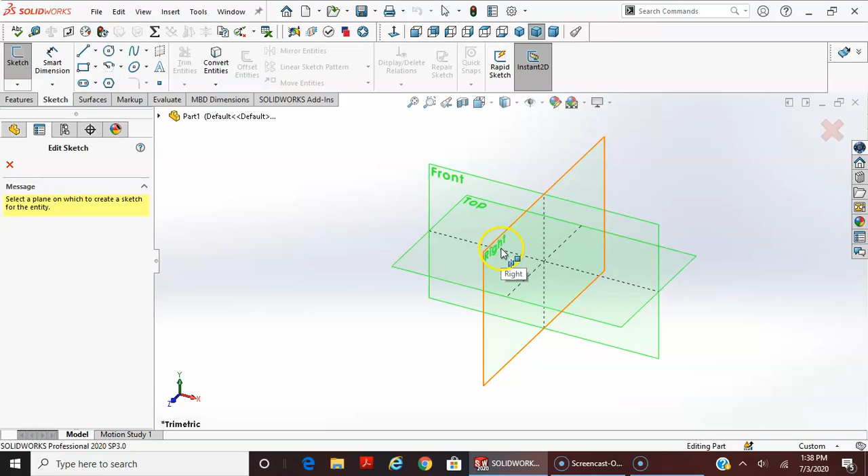So I have my part file open. I'm going to start with a sketch tab, sketch icon. The orientation again doesn't matter. I'll just for example use the right. And it's pretty easy for this.

I'm going to ask for 3 sketches and 3 features. So the first is going to be the base, and I'm going to start very simply like this.

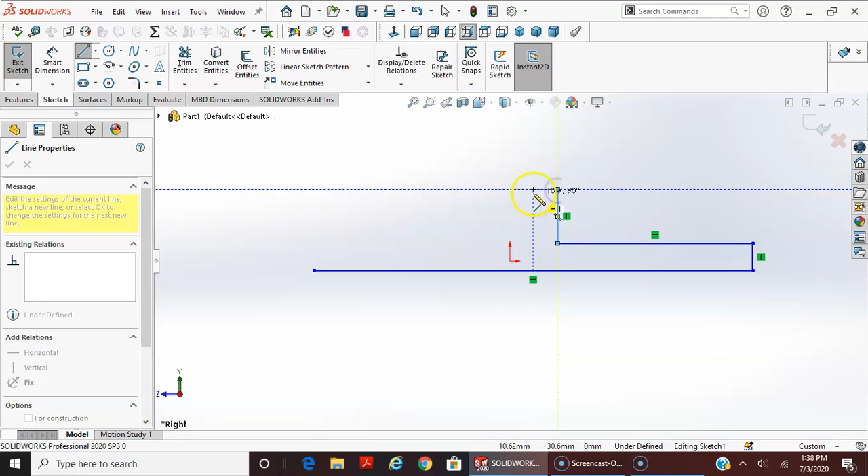I'm going to make the half profile of the screwdriver like this, maybe a little arc here, going up to a straight line from here, and then go back to an arc, and I'll actually make this a vertical line. So just based on this isn't going to have a tangent point, but I will add this and this with a tangent point.

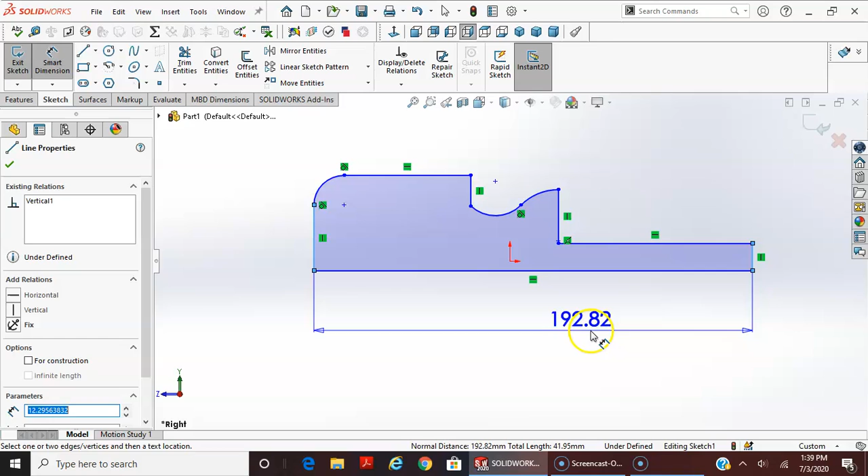Now it's really important on your assignment that you dimension all of this. I have this again in metric. I'll do here and here, and here and here like this. Make sure this is all dimensioned.

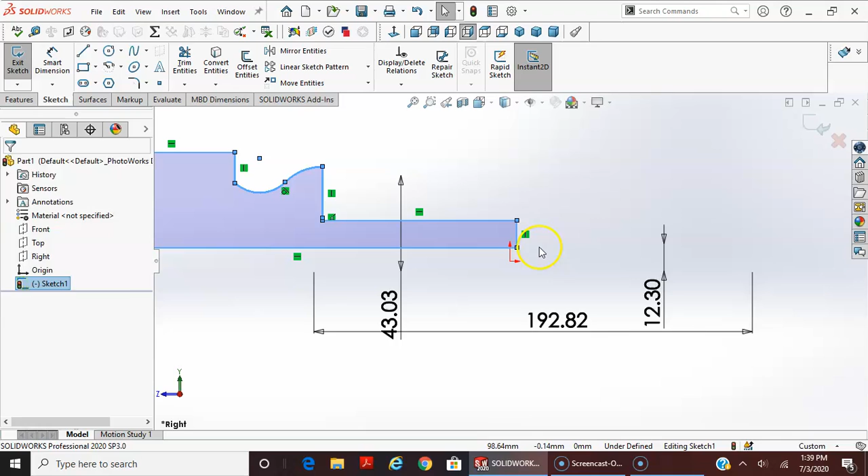Now, these entities are all blue, but if I were to take this, I'm going to drag this over a little bit, and I'm going to make this point, hold Control down, and make my part origin coincident. And you can see once I did that, some of these entities that are dimensioned are black. So these defined entities are black, the underdefined entities are blue.

When you do yours, I want this sketch completely defined, okay? The other sketches I actually kind of don't care about, but I want to make sure the base sketch is defined. And I think in the book, they leave the tip sketch underdefined, and I'll show you another way how I do that to keep it defined.

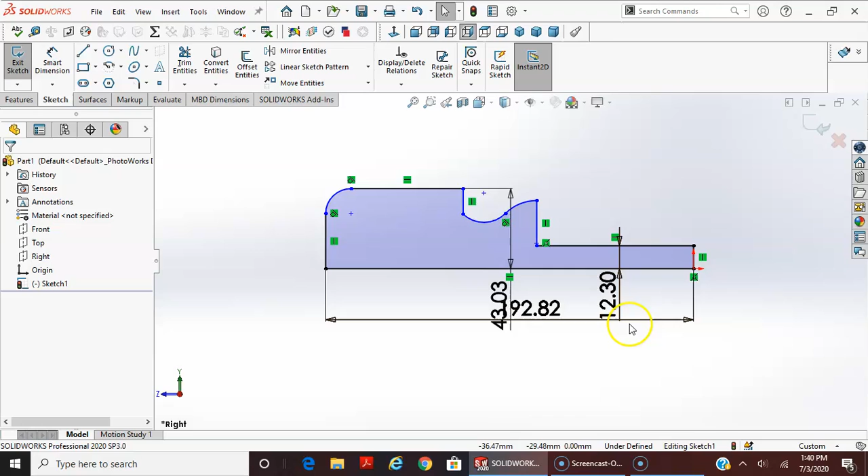So from here, it's pretty easy. Again, keep this defined. Before I go any further, I'm going to add my last name, first initial, and the title is Extra Credit Screwdriver.

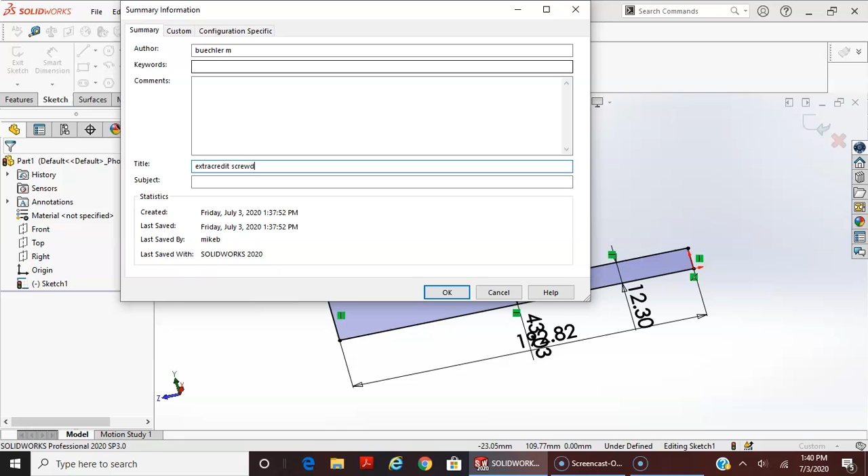And then I'm going to also do a file save as on my desktop, and it's going to be last name first, Buechler M, and I'll just type in screwdriver. So I now have a copy. This file is now saved on my desktop.

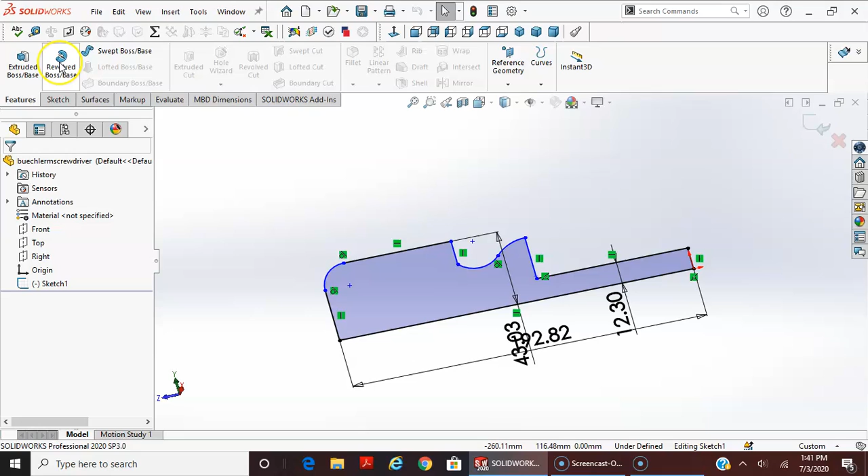So in what should be for you a fully defined sketch, mine's not defined, I'm going to select features, and instead of extrude boss base, I'm going to do the, look at the tooltips now. This is the updated version. They have the tooltips that have more directions and definitions when you keep your mouse over the icon.

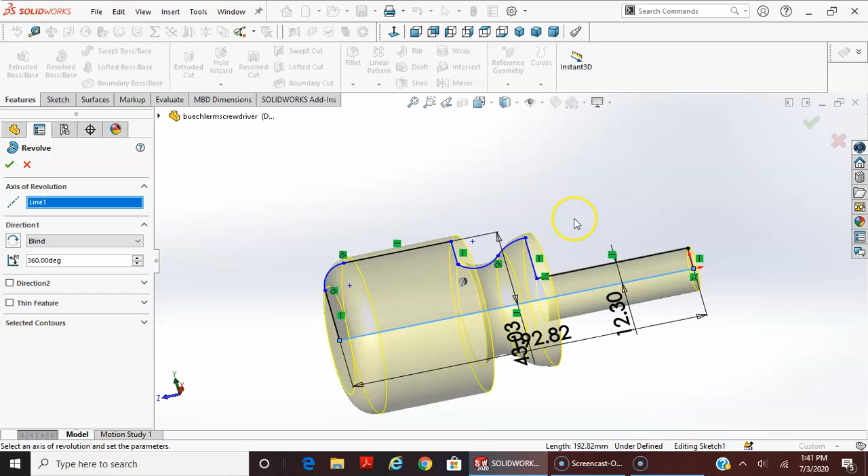I'm going to select the revolve boss base, a revolved one. The axis of revolution is going to be this line. This is the center of my part. The default is 360 degrees, so this all looks good. I'm going to say yes.

And this is the start. You can do it just like this, honestly. As far as your design, just make sure this sketch is fully defined. I can go back in and edit the sketch there. I'm going to do again, I might have messed up when I used the right.

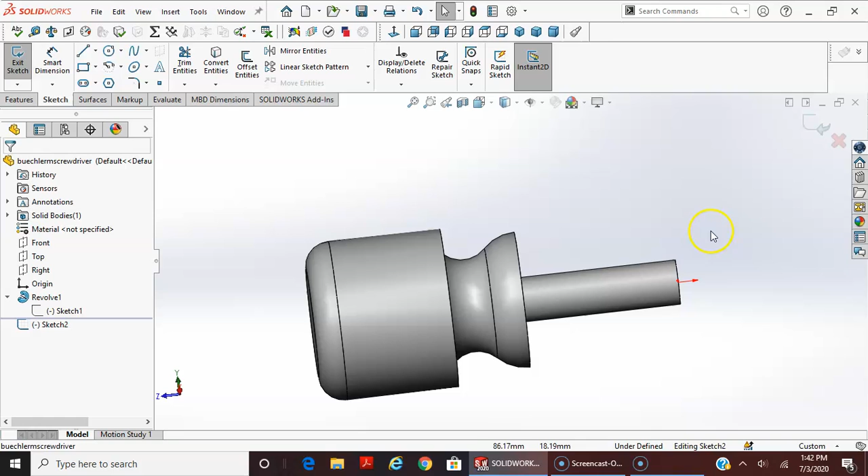So let's see, I'm going to sketch again. And on the flyout menu, let's go to, I can use the top. And for I'm going to go right click and go normal to.

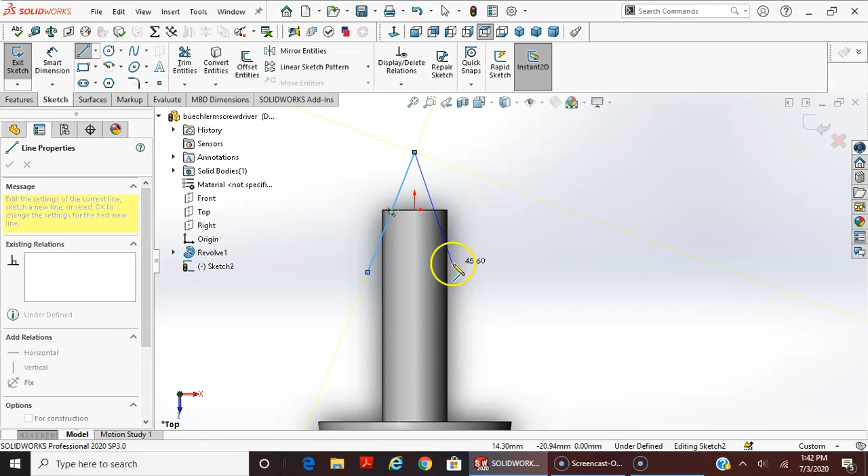For the tip, the book does it kind of confusing. I don't like how the book does it, so I'm just going to go like this. I'll draw a line, and then an arc like this. This part doesn't need to be defined, but you actually can define it.

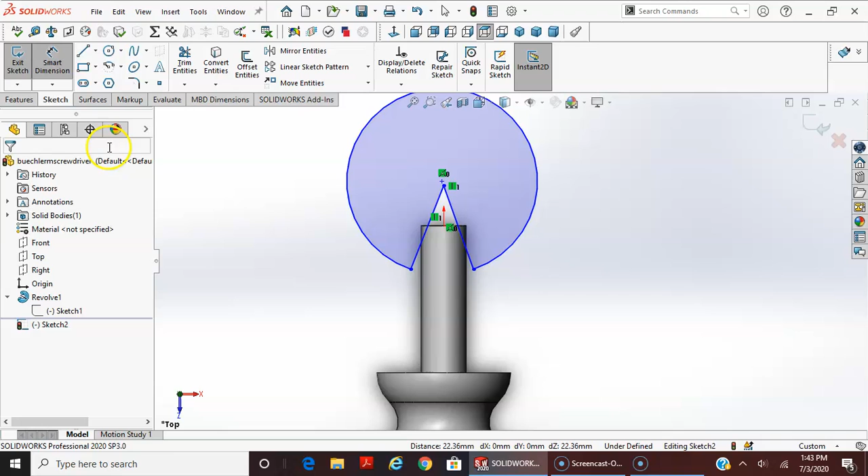A quick way is to select this point and this point, and make these vertical. Then I can dimension from here to here, using whatever number's there. I'll dimension this value the same way. Then I think the only thing left is to dimension from this point to this point.

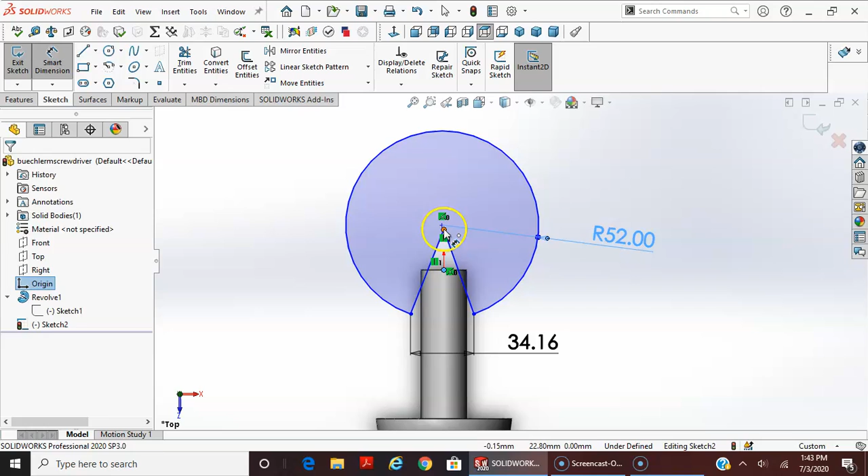Is that fully defined? No, there's something else wrong here. What else is wrong? How can I move this? Let me grab this and try to move it around.

Oh, that's how. So the way you do this is make a center line here, and I can select these three lines - one, two, three - and make them symmetrical. Done. But it's still not fully defined.

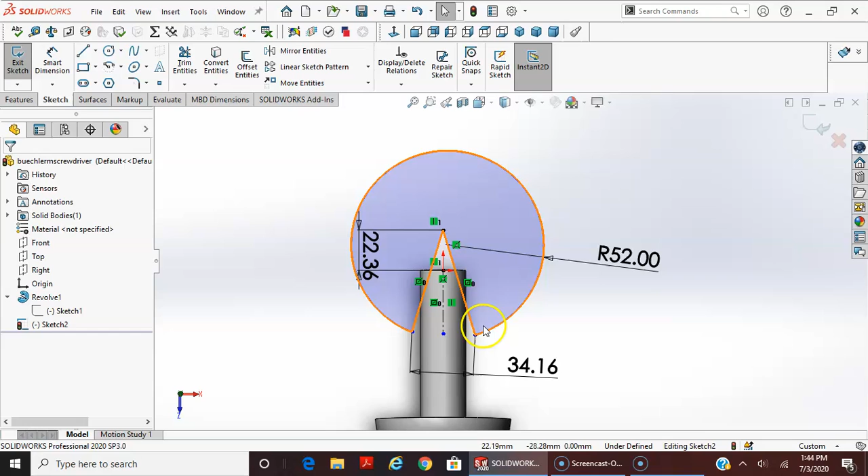Let's see what else is going on here. Maybe this line length - let's smart dimension this line length. Yeah, there we go. Boom, that's it.

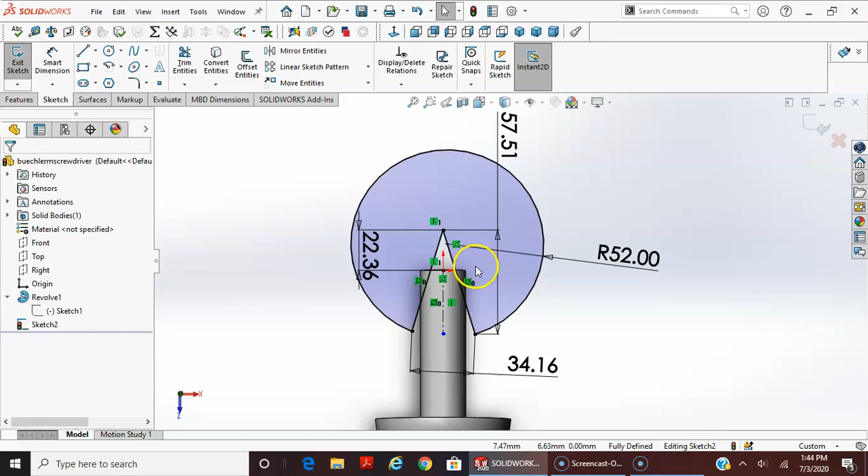So again, the book doesn't define this sketch - they do it kind of wonky, and that's fine. This sketch doesn't have to be defined, but I did define this one.

Now features - let's do a cut, and go through all, both sides. Done. So there's my tip. It's a very dull tip, but it's something.

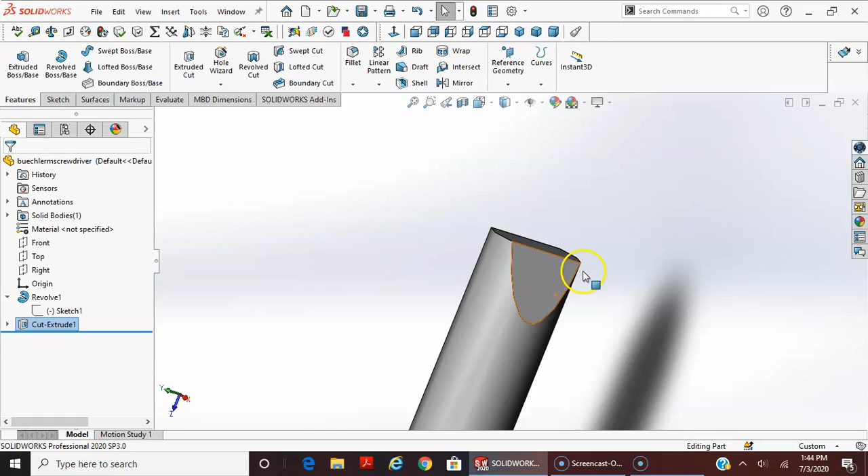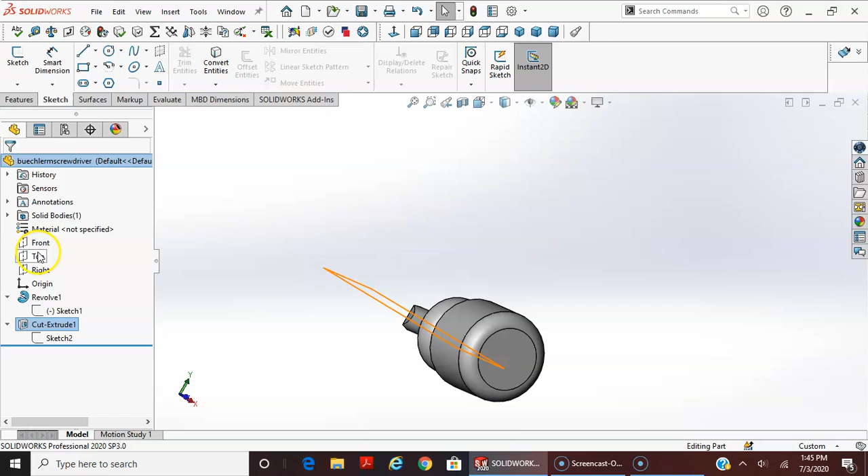On the third sketch - so I've got three sketches - this one needs to be defined, this one doesn't matter. Again, I'm going to select a sketch, and in this case you can probably use a default plane, which here I could have used the front plane.

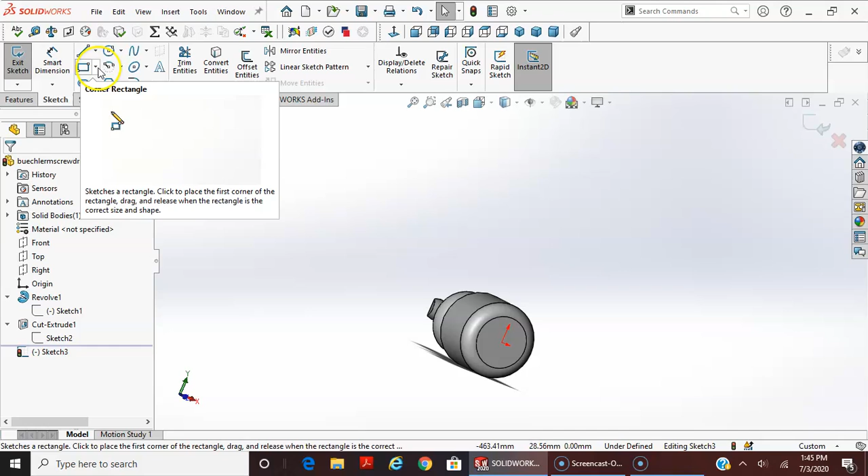But I'm going to select this face for the sketch. This is another example of how the book makes it really hard to do this, and I don't know why. I'm going to select the center rectangle.

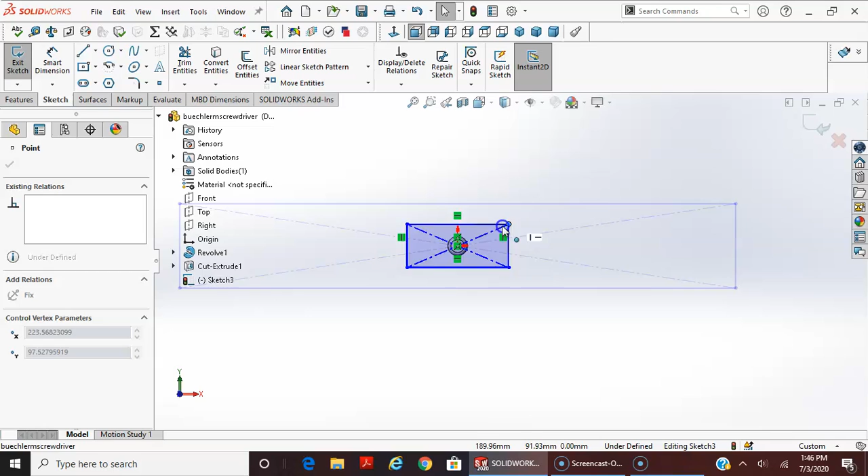I'm going to make this one kind of small, and this is an instance where we really want to see if I can get to normal-to with an active sketch - and you can. So I'm going to zoom in on this, bring it way down here, zoom in, way down here, just to where it cuts slightly like that.

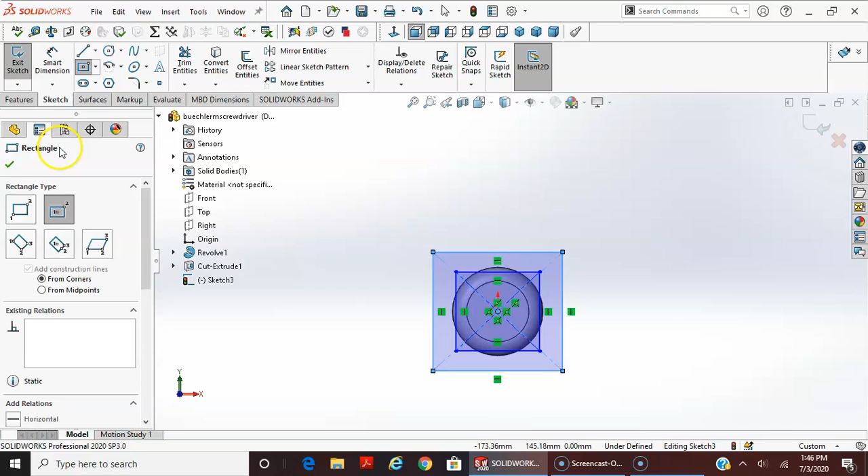This one's pretty easy - you can actually define this if you use the center rectangle, super easy, just two dimensions and you're good to go. I'm going to do the same thing again with another, larger rectangle, and show you how easy it is to dimension.

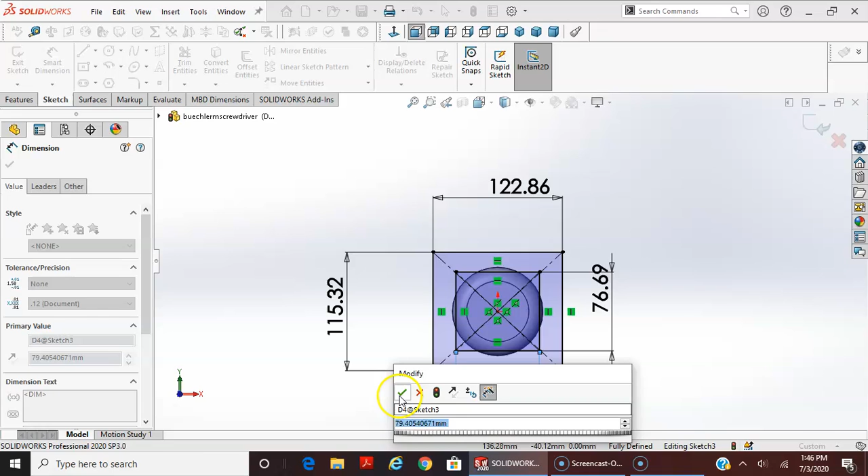Just dimension this - yes. Dimension this - yes. This line - yes. This line - yes. So I don't care if this one's dimensioned, just that it's fully defined. It would be nice if you did it though.

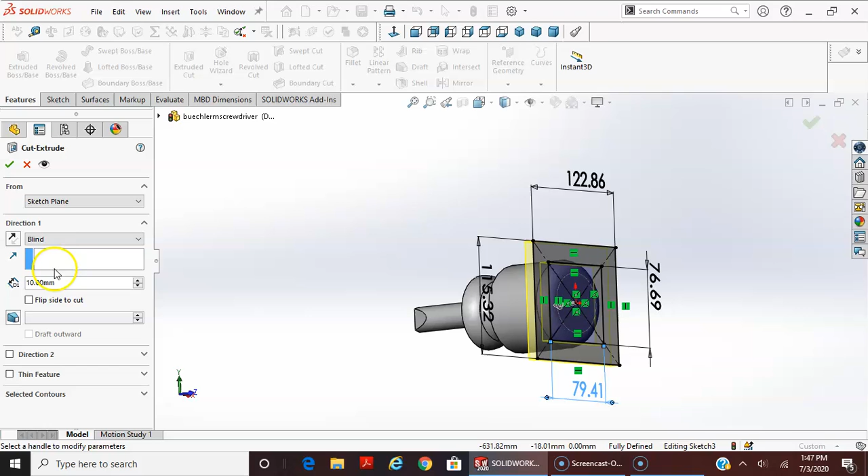Just make sure you have a third sketch, and once this is a fully defined sketch, I'm going to select features, cut, and let's see the preview. Let's go through all - I think that's good. I'm going to say yes, and now you can see there are three sketches, three features.

I've got a base revolve, I've got the tip, and I've got the handle cut as well. So this is what I'm looking for.

Make sure this information - summary information - is there on all your files. I'm going to go File, Save, and this is what you should submit.